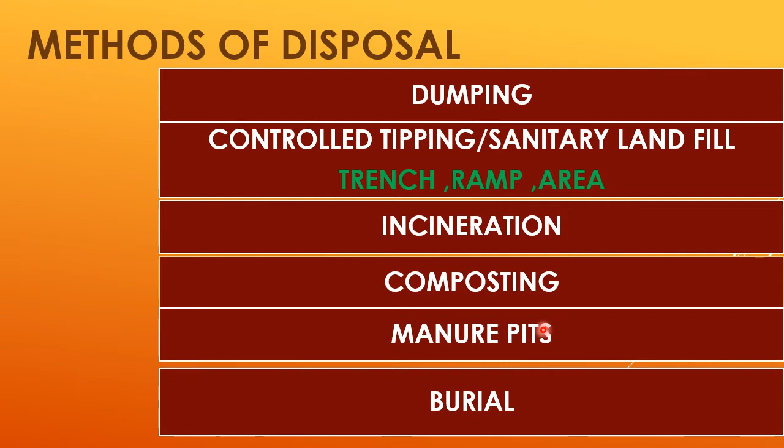The principal methods of waste disposal are as follows. Firstly, we have dumping, next controlled tipping or sanitary landfill, and under this we have trench method, ramp method, and area method. Next we have incineration, composting, manure pits, and burial. So to repeat, what are the methods of disposal? We have dumping, controlled tipping or sanitary landfill, which is further divided into trench method, ramp method and area method, incineration, composting, manure pits and burial.

So let's discuss each method of waste disposal in detail. So firstly we have dumping. So what is dumping? Refuse is dumped, as you can see here, in low-lying areas partly as a method of reclamation of land and is an easy method of disposal of dry refuse. As a result of bacterial action, refuse decreases considerably in volume and is converted gradually into humus.

So what is dumping? I repeat, as you can see in this picture, refuse is dumped in low-lying areas partly as a method of reclamation of land and is an easy method of disposal of dry refuse. So what happens when you dump here? As a result of bacterial action, refuse decreases considerably in volume and is converted gradually into humus.

The drawbacks of open dumping are as follows. The refuse is exposed to flies and rodents, right? So dumping has its disadvantages. So what are the disadvantages? The refuse is exposed to flies and rodents. It may be a source of nuisance from the bad smell and unsightly appearance, and the loose refuse may be dispersed by the action of the wind.

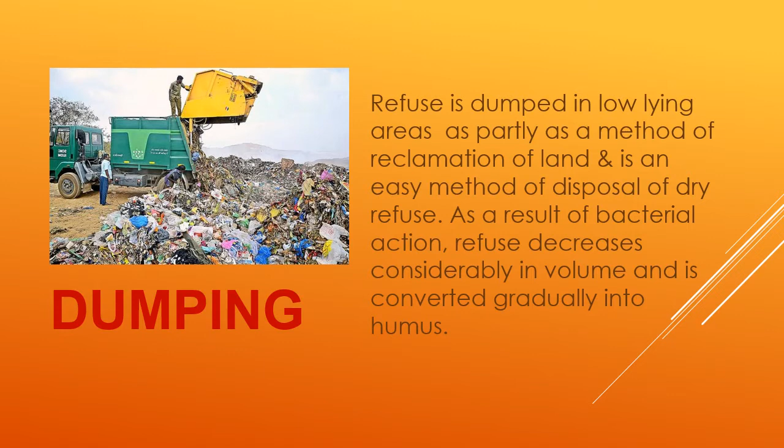Okay, so there are disadvantages of dumping as well. So what were the disadvantages? The refuse is exposed to flies and rodents. It may be a source of nuisance from the smell and unsightly appearance, and the loose refuse may be dispersed by the action of the wind. Okay, so this was about dumping.

Next we move on to controlled tipping, otherwise known as sanitary landfill. So what is this? This is the most satisfactory method of refuse disposal where suitable land is available. So where there is suitable land available, what is the method of waste disposal which is suitable? It's controlled tipping or sanitary landfill.

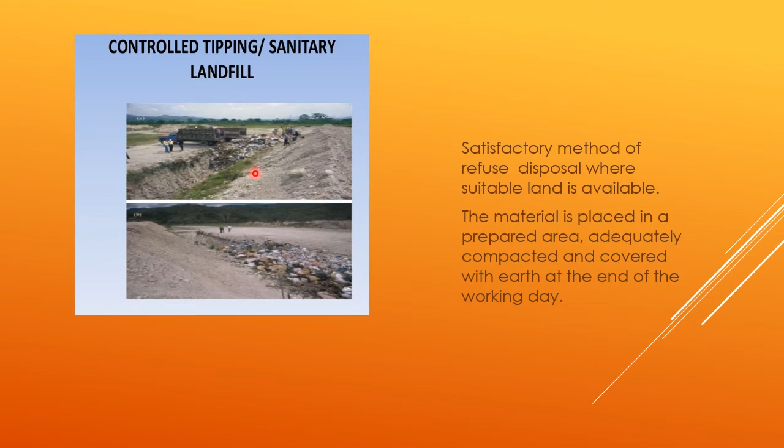It differs from ordinary dumping. How does it differ from ordinary dumping? Here the material is placed in a trench or prepared area, adequately compacted and covered with earth at the end of the working day. Okay, so here what is the difference between controlled tipping and dumping? The material is placed in a prepared area, adequately compacted and covered with earth at the end of the working day. Whereas there it was open dumping, but here you're covering it with earth at the end of the working day. So that was about controlled tipping or sanitary landfill.

So as we discussed earlier, controlled tipping or sanitary landfill is further divided into trench method, ramp method and area method. So let's discuss each method. Where is it used? So the first one is the trench method under controlled tipping. So what is trench method and where is it used? Trench method is practiced where level ground is available. I repeat, trench method is practiced where level ground is available. The refuse is compacted and covered with excavated earth. That we already discussed in controlled tipping, that we cover it with excavated earth. So where is trench method used? This is done where level ground is available.

Moving on to the ramp method. Now where is this suited? This is well suited where the terrain is moderately sloping. So ramp method is suited or practiced where the terrain is moderately sloping. So finally under controlled tipping we have the area method. So where is this used? This is used for filling land depressions, disused quarries and clay pits. So where clay pits or depressions are available, it is used for filling them. Okay, so we discussed trench method, ramp method and area method.

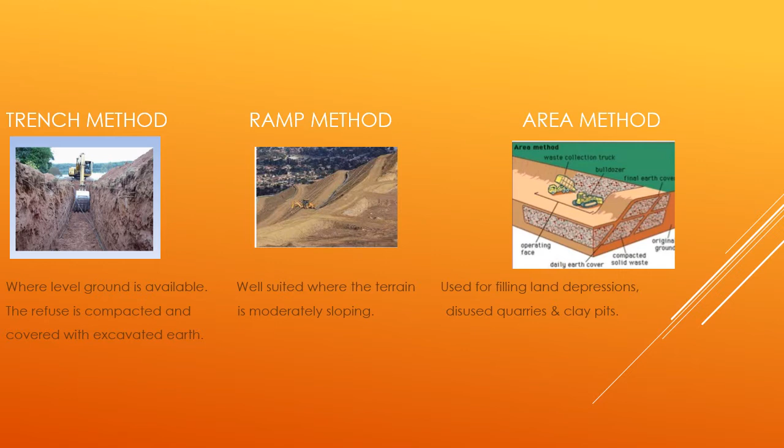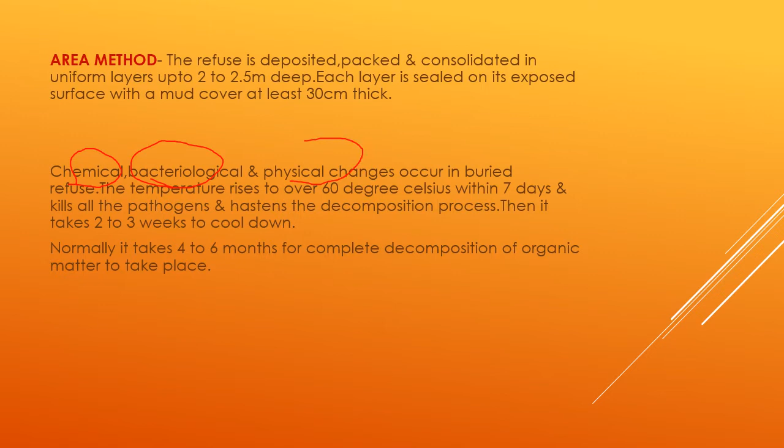Continuing with the area method, what do we do in area method? The refuse is deposited, packed and consolidated in uniform layers up to 2 to 2.5 meters deep. Each layer is sealed on its exposed surface with a mud cover at least 30 centimeters thick. So what happens after this? There are chemical, bacteriological and physical changes that occur in buried refuse. And what happens to the temperature? It increases to 60 degrees Celsius within 7 days, within a week, and all the pathogens are killed, which increases the decomposition process, and it takes 2 to 3 weeks to cool down.

Okay, so once layers of refuse have been deposited and packed, and each layer is sealed on its exposed surface with mud, what changes take place in the buried refuse? Chemical, bacteriological and physical changes occur. And the temperature increases to 60 degrees Celsius within a week and it kills all the pathogens. So automatically the decomposition process speeds up. Then it takes 2 to 3 weeks to cool down. But normally it takes 4 to 6 months for complete decomposition of organic matter. So I repeat, in area method you're depositing the refuse in uniform layers and each layer is sealed on its exposed surface with a mud cover at least 30 centimeters thick.

So finally with the area method, ramp method and trench method in controlled tipping or sanitary landfill, what happens? There are chemical, bacteriological and physical changes in the buried refuse. Temperature increases to 60 degrees Celsius within 1 week and all the pathogens get killed. The decomposition process hastens and it takes 2 to 3 weeks to cool down. For complete decomposition of organic matter, normally it takes 4 to 6 months. The bulldozer may be used for trimming and spreading the top soil. So this was about controlled tipping or sanitary landfill, and we discussed the area method, trench method and the ramp method.

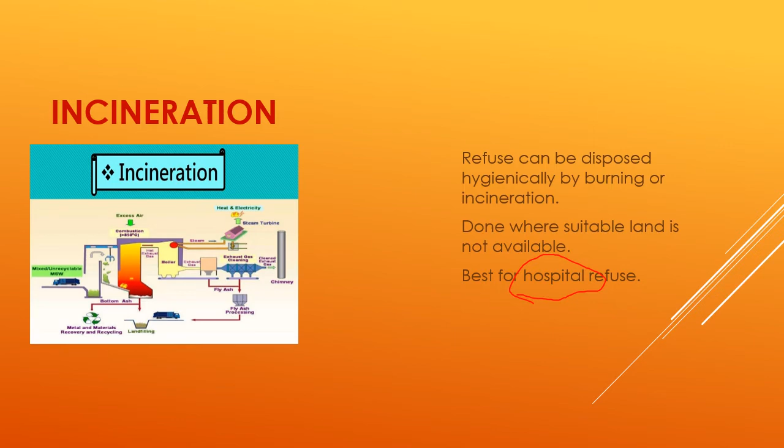Next we move on to composting. So what is composting? It is a method of combined disposal of refuse and night soil or sludge. So here what are you disposing? It's a combined disposal of refuse and night soil or sludge.

So it is a process of nature by which organic matter breaks down under bacterial action, resulting in the formation of relatively stable humus-like material called compost, which is used as manure for the soil. So composting method is very useful. Why? Because the compost which is formed can be used as manure for the soil.

So it is a combined disposal of refuse and night soil. Okay, two things. And what happens? It is a process of nature by which organic matter breaks down under bacterial action, resulting in humus-like material called compost. And compost is used as manure for the soil.

Okay, so what are the byproducts formed during this process? The byproducts formed are carbon dioxide, water and heat. So the heat produced during composting over a period of several days destroys eggs, larvae of flies, pathogenic agents, etc. So pathogenic agents are destroyed because of the heat produced during the composting.

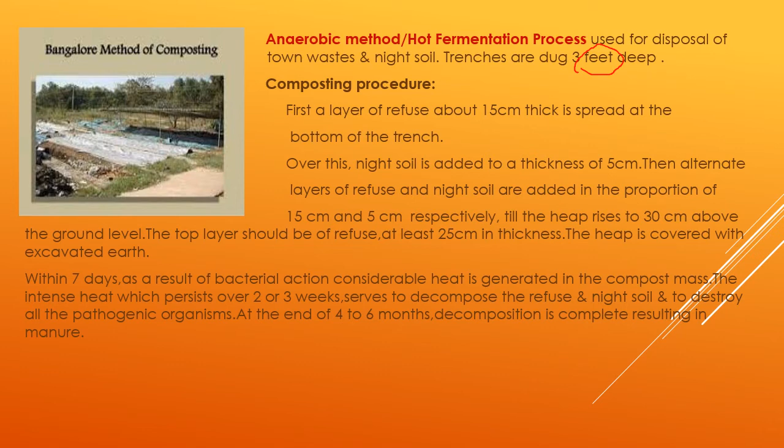So this was about Bangalore method of composting. I hope you understood it. It is also known as anaerobic method or hot fermentation process, and this is used for the disposal of town wastes and night soil.

The next type of composting is mechanical composting. Earlier we discussed the Bangalore method, or anaerobic method, or hot fermentation process. So now we'll discuss mechanical composting. This mechanical composting is also known as the aerobic method. Okay, so what is it?

The pulverized refuse is mixed with sewage, sludge or night soil in a rotating machine and incubated. The factors controlled in the operation are carbon-nitrogen ratio, temperature, moisture, pH and aeration. Okay, so in the pulverizing machine, what happens?

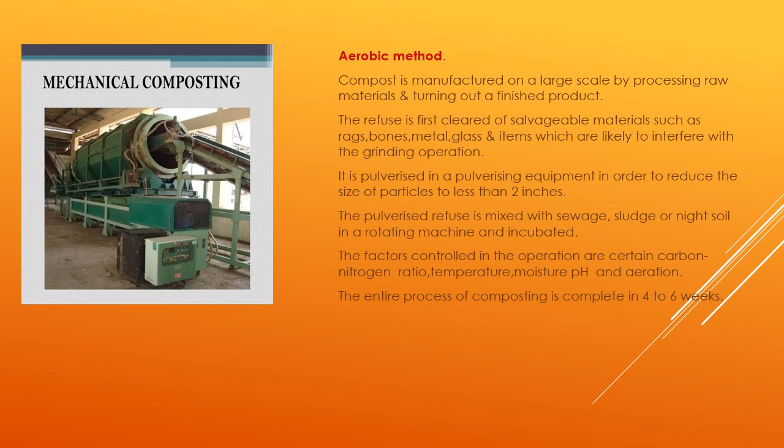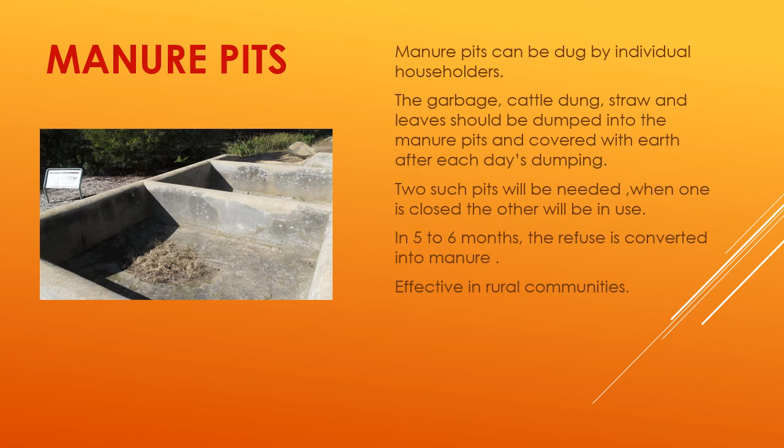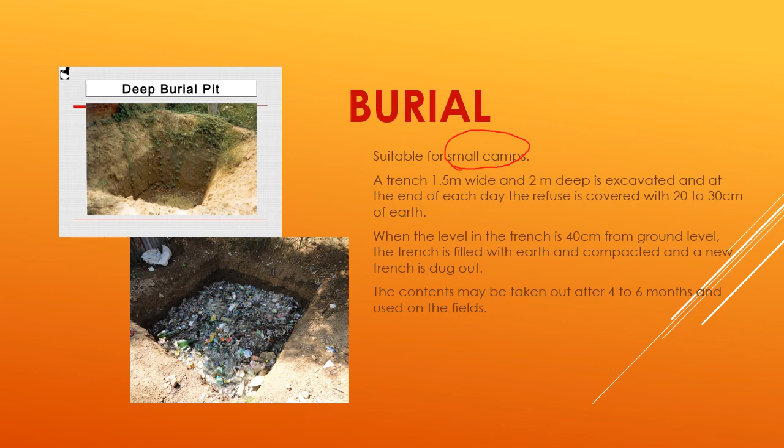Okay, so the contents may be taken out after 4 to 6 months and used on the fields. So burial is most suitable for small camps. Okay, so that finishes the discussion on solid waste disposal.

So finally, to summarize today's session, what did we learn today? We learned to mention the hazards of solid waste accumulation, to list out the sources of refuse, to mention and discuss the types of solid waste disposal. We learned to explain composting. We learned to mention the method of waste disposal in small camps and hospitals.

Okay, so the most expected questions from this chapter would be mention and discuss the types of solid waste disposal, and a very commonly asked question in the university paper would be explain composting. So here you would have to explain the Bangalore method as well as the mechanical method of composting.

And the very important viva question, to reiterate: mention the method of waste disposal in small camps. You need to reply with burial. Mention the method of waste disposal in hospitals. You need to mention incineration. Okay, so I hope you understood the types of waste disposal.

So to summarize, what were they? They were dumping, controlled tipping or sanitary landfill, and under that we discussed the trench method, ramp method and area method. Then we discussed incineration, composting, manure pits and finally burial. And I also told you the expected questions in your university exams.